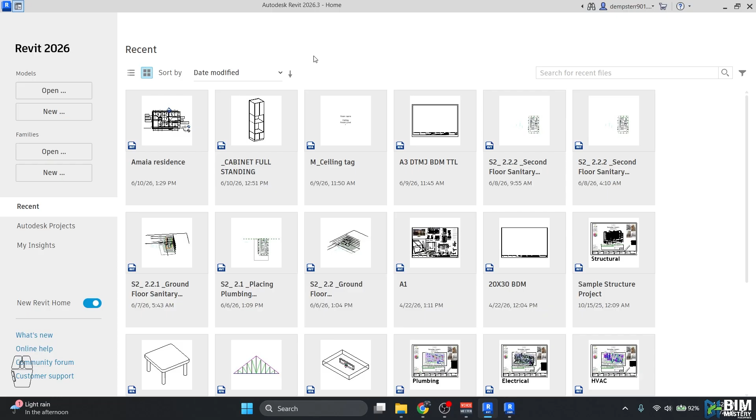So dito sa lesson na to, i-develop natin yung ating second floor sanitary and then vent system. So para magawa 'yon, let's go ahead and open our file which is etong ating S2 2.3, second floor sanitary system. And then make sure natin na all supported files and then wala tayong work sharing, and then hit natin yung ating open after natin mag-click. And then after nito mag-loading, dadalhin nito tayo sa ating second floor sanitary system.

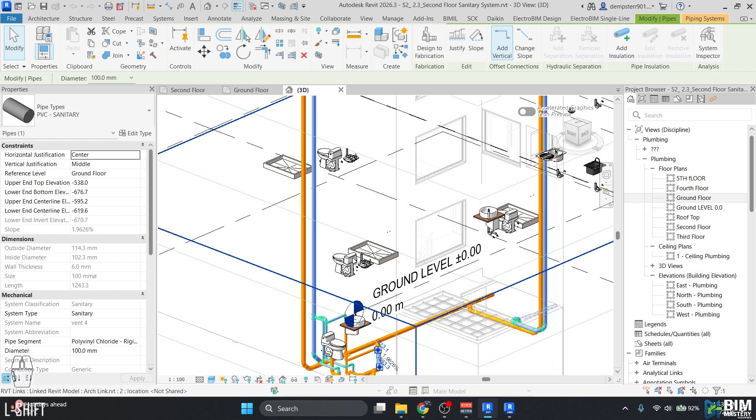Okay? So remember our last lesson, nakapag-develop tayo ng ating sanitary system and then also yung ating vertical waste and then vent system natin. Yan, titignan natin sa 3D view. So ito yung ginawa natin last lesson. So i-continue natin to and then i-connect natin yung mga fixtures natin dito sa ating vent and then sanitary horizontal natin, sa second floor.

So let's go ahead and go to second floor. Yan, let's close our ground floor and then 3D view. And then let's inspect first. So kung makikita natin in our 3D view, tignan muna natin that we have our fixtures. But since nakapaglagay tayo ng tinatawag natin mga plumbing connectors, dito na tayo magko-connect. So this plumbing connectors is very useful when it comes to connection, pag-connect ng mga pipings natin.

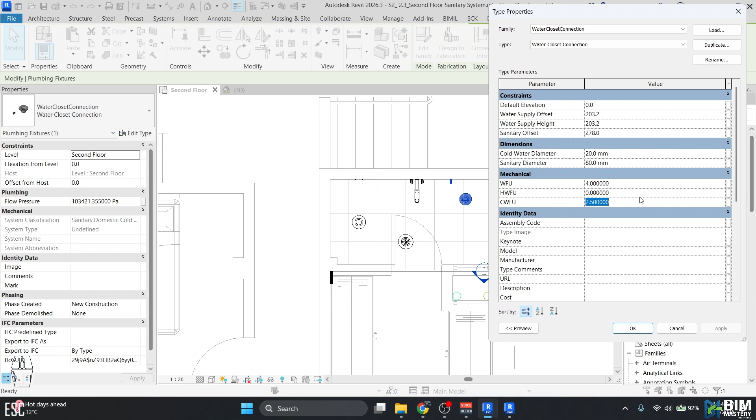Okay, and then also kung makikita natin, meron na rin itong mga GPM values, flow pressure. Ito, meron na tayong water fixtures unit, hot water fixtures unit, and then cold water fixtures unit that we can set to actually provide some of the detailed information for our pipe.

So before that, let's make sure na nasa second floor tayo and then let's inspect right here. So itong section na to, we can delete this section. Okay? Ayan. And then I think dito tayo mag-uumpisa. So to do this, ito i-connect natin siya papunta dito. Gagawa tayo ng main horizontal branch natin dito. And then dito, i-connect natin yung mga pipings natin papunta dito, as I can see.

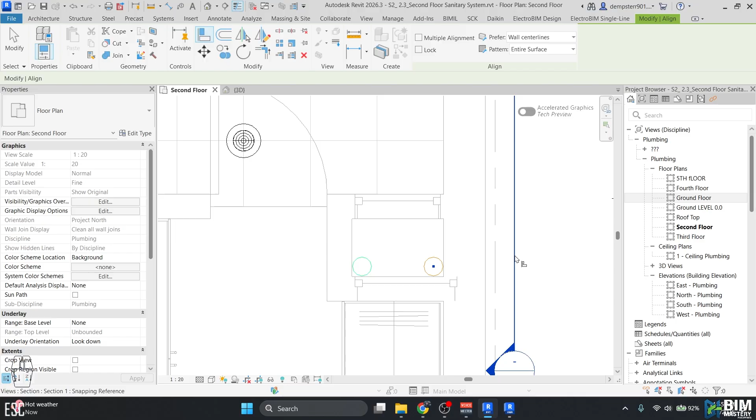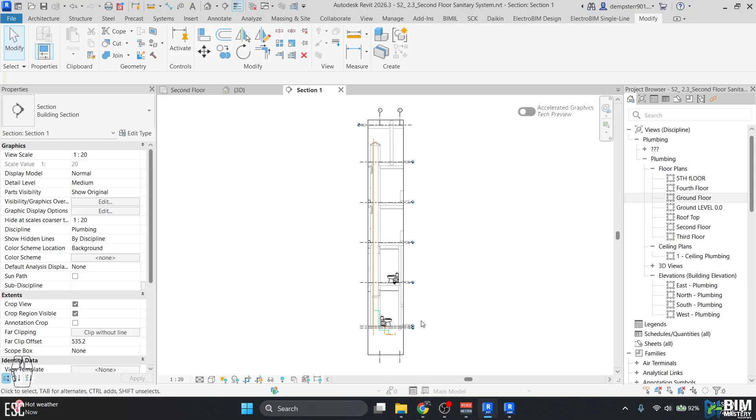So in-align natin yan para makita natin ng mas maganda yung ating pipe. So ito, i-align lang natin hanggang dito na hindi natin ma-cover yung ating vent system. Kasi kapag kinover natin yan, may tendency na kapag pumunta tayo sa section and nag-type tayo ng PI, may tendency po na ma-connect natin. Ayan, kung mag-hover tayo dito and then pansinin niyo dito sa gilid, makikita natin na pipe PVC vent, 100 mm. Yun yung nearest pipe niya.

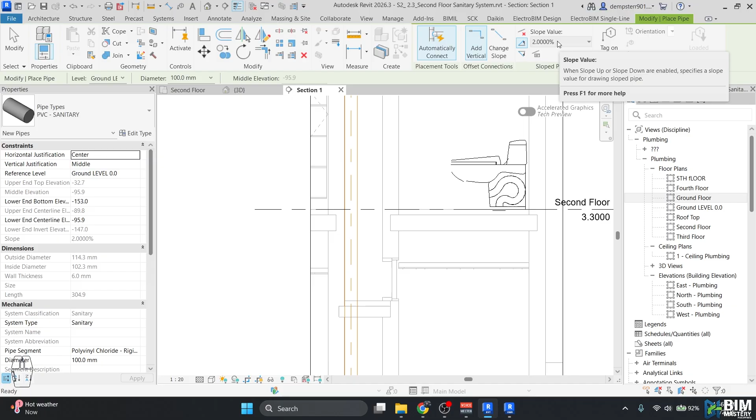But if we adjust our scope sa ating section box, click natin, then click natin PI. Remember, di na natin ma-hover yung ating vent system kasi yan lang yung kinover natin. Okay? So in this case, dito tayo gagawa. Click natin to dito and then make sure na yung slope natin is 2% and our pipe is 100 mm. So click tayo dito and then make sure na nasa ilalim tayo ng second floor elevation natin. And then dito natin siya gagawan ng ating pipe.

Okay. So to do that, madali lang po yan. Ang gagawin lang natin is hover tayo dito. Click natin yung pipe. Click natin yung create similar under modify pipes. Or we can just type in CS on our keyboard. And then dito, draft tayo. And then we're gonna make sure that our slope is on slope up, and then slope value natin is on 2%.

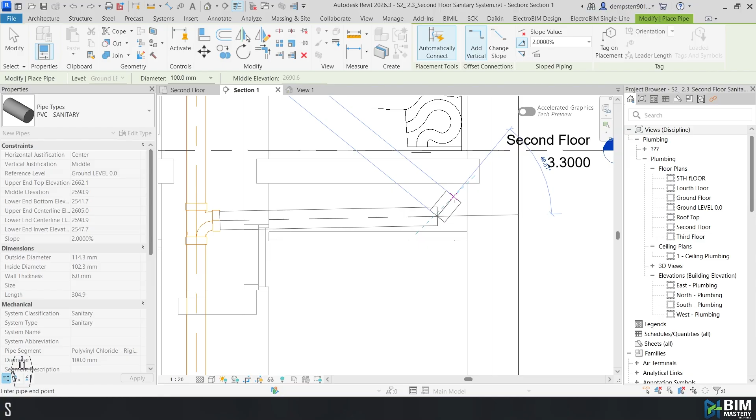Okay? And then click tayo dito and then hover tayo until dito sa gilid, and then we're gonna make sure that we are running on about, let's say, 45 degree. Or cancel muna natin. So make sure lang natin that we are on above ceiling. And then click natin yung pipe, CS again, and then click tayo dito, 45 degree. And then delete natin yung excess pipe. Zoom in tayo dito, right click natin, and then component. And then view natin yung ginawa natin.

So on our 3D view, this will be our clean out for that specific horizontal branch. Okay? So, ang next step naman natin, after natin i-connect yung ating ano dito, what we're going to do next is to set up our branch. Ito, i-connect na natin to from our horizontal. Ito mga accessories natin, ito mga pipe, ay yung mga plumbing connectors natin na to.

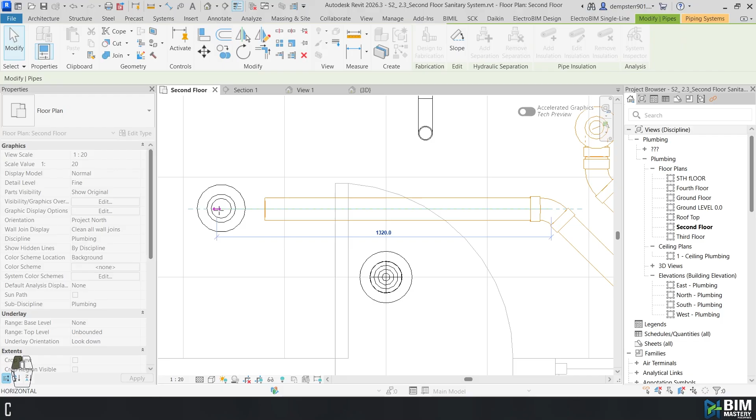So if ever hindi natin sila ma-connect, what we can do is to right click right here and then align natin. Zoom in lang tayo. Yan, and then make sure na center yung ating plumbing fixture, and then hover natin and then up to right here. Okay? So magko-connect na po yan sila. Okay? So our next is this one.

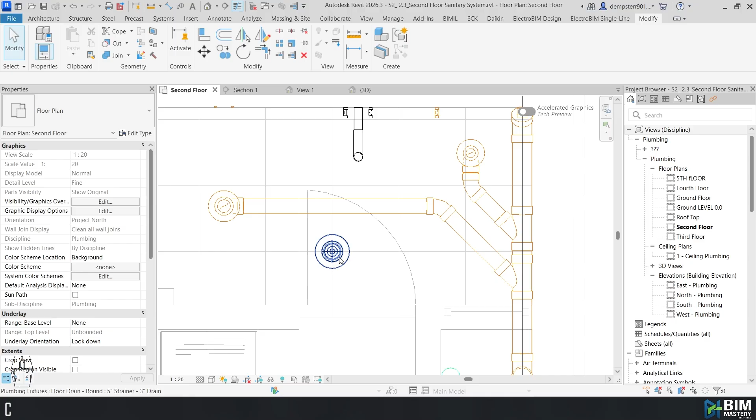So, click tayo dito. CS natin to. And then, inherit size, inherit elevation, and then right here, 2%. And then, click natin dito. And then, connect natin dito. Okay? And then we're gonna make sure that we change this on to WYE 45 degree reducing. Okay? And then ito.

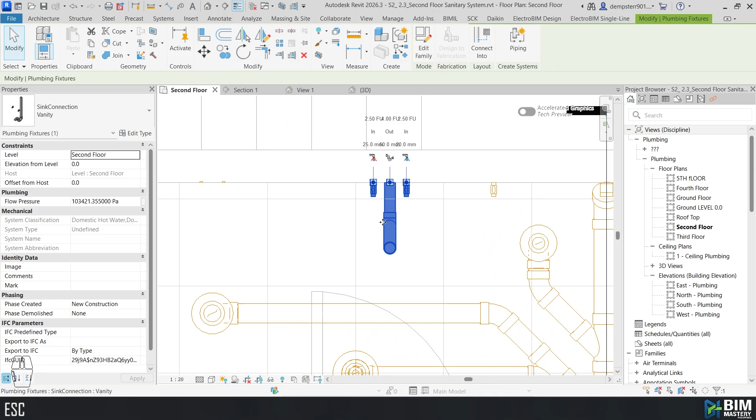Okay? So our next step is the tinatawag nating sanitary or yung ating lavatory. So to do that, click lang natin to, CS, and then inherit size, inherit elevation, slope up about 2%. And then we're gonna make sure that we are running on 45 degree right here. And then eto, palitan natin ng WYE 45 degree reducing. And then I think this connector is on 50 mm. So click natin to. 50 mm.

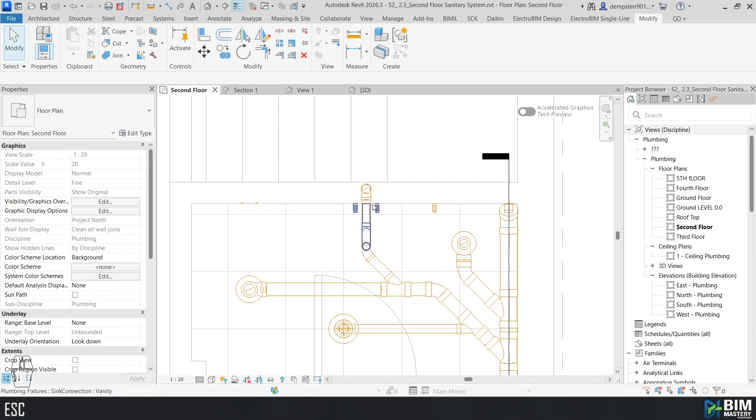We can also inspect that by clicking our connector and then zooming in. Makikita natin that we have our 50 mm dito. So since alam na natin connector, we can click and then right here. Sorry. I think this one. And then draw pipe tayo and then click natin dito para ma-connect natin sila. Okay? So, eto, ang gagawin natin dito, kasi gagawa tayo ng vent system natin dito, since connected na sila lahat, we can align this first right here.

Okay? So, after natin ma-align yung section, open ulit natin yung ating section 1, makita natin that this is our, tinatawag nating sink lavatory. But as we can see, yung elevation from level natin is a bit weird, I think hindi natin na-set up yung elevation from level natin.

So, I think this elevation is around 330 para dito. Enter natin dito and 330. Okay? Yan. And then, our connector says that, makita natin, we have a sanitary connector, 500 mm.

So, I think, edit type natin to. And then dito, sanitary connection height is on 500 mm. Okay, sorry, 500. And then our default elevation is on 250. And then dito sa sanitary connection height natin is on 500.

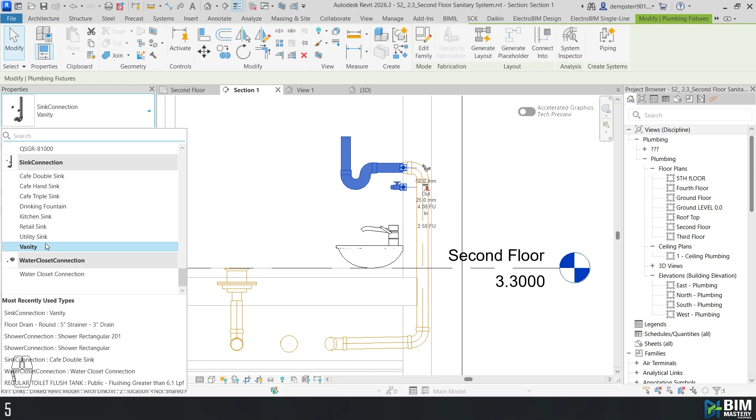And I think sanitary. Sorry, cancel muna natin. Yan, parang may mali tayong inedit. So 330 to. Duplicate natin siya. Yan, edit type. And then, duplicate natin. Gawin natin 203 to. Sanitary sink, 203. Apply. And then, make sure na ang ating sanitary connection height is at 500.

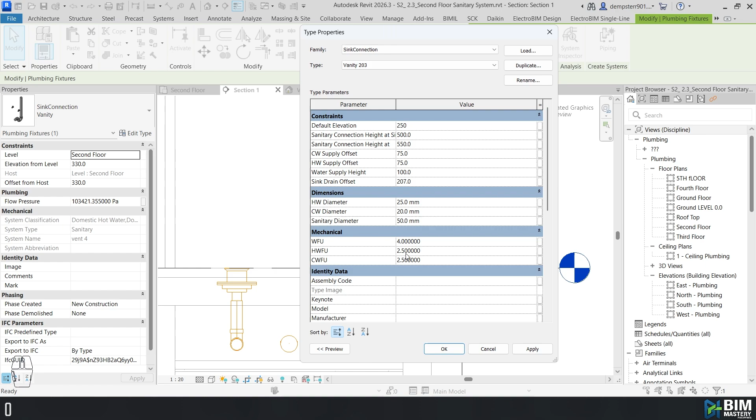Okay. And then, 550 naman dito sa ano. Yan. 75, 75, 100. And then, dito sa sink drain offset is 207. Okay. And then, of course, yung elevation natin is at 250. Yan. And then, WFU 2.5, 2.5, 4. Apply natin. Then, click natin.

Okay. Yan. So, I think okay na yung ating sink. So, let me, ano muna saglit. Yan. Check if okay na yung ating sink and then drain. Yeah. So I think ito na yung ating sink. So okay na siya dyan and then align na siya.

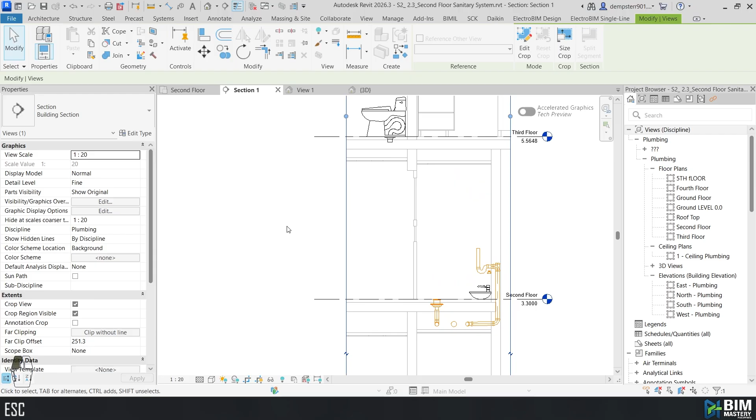So dito, click natin yung ating pipe fittings na to, yung elbow, and then click natin plus to make a connection for our tinatawag nating vent system. Yan. So ang vent system natin is dadaan natin sa ceiling papunta dito. And then connect natin siya sa ating horizontal branch. So to do that, ang gagawin natin is punta lang tayo dito sa ating ano.

Yan. And then eto, padaanin muna natin siya diyan sa taas. So balik tayo sa section. Click tayo ng PI for our pipe and then make sure na ang gagamitin natin is PVC vent. And then our system type is on vent system. Click natin apply, click natin dito, and then padaanan natin siya dyan sa taas, slope 0, and then dito.

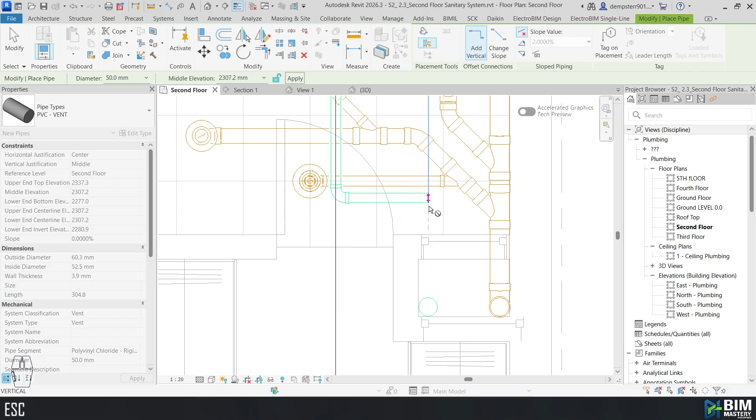Okay? So after natin may daan sa taas, we're gonna go to our second floor again to make sure na makita natin yung ating vent system. Yan. So dito, adjust natin yung ating piping. Right click natin dito, draw pipe. Wala naman pong specific. So just like this one lang. Yan. So ito, na-connect na natin siya sa ating piping.

So we're gonna view that onto our section. Adjust natin tong section natin na to dito. Yan. And then click natin. As we can see, this will be our vent. Kinonect na natin siya sa ating vertical vent stack. Okay? So after naman nito, ang next naman na gagawin natin is yung connection naman para dito sa ating water closet.

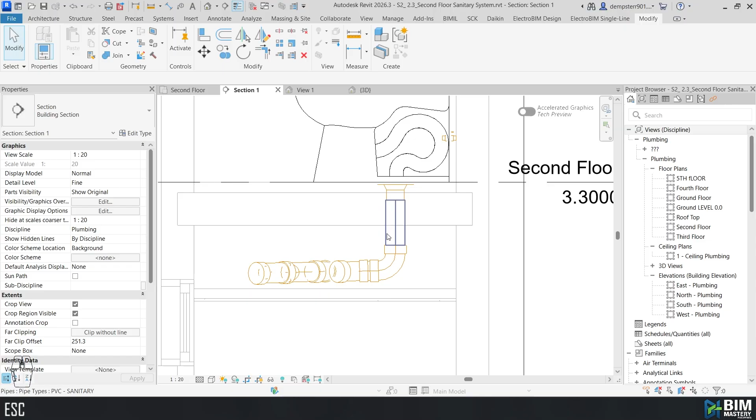So to do that, align lang natin yung ating section sa ating water closet, and then double click natin yung section, na ito yung ating water closet. So either way, we can just CS dito, and then I think dito about 50 mm, yes, yan. And then slope 0, I think okay naman, or kung hindi, what we can do is to adjust muna yung piping natin, pinabababa, yan.

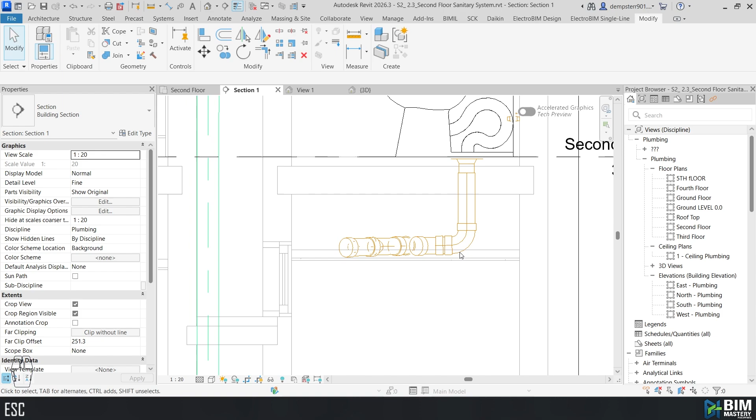So click natin yung pipe again, or click tayo ng PI, yan, and then make sure na our system is on vent, and then our pipe type is on PVC vent. Yan. So click natin to about 50 mm. So click tayo dito, and then adjust natin yung ating piping. Nasa pinakasagad po, yan. And then ito, adjust natin paangat. So hanggang sa ma-satisfy lang natin yung constraint.

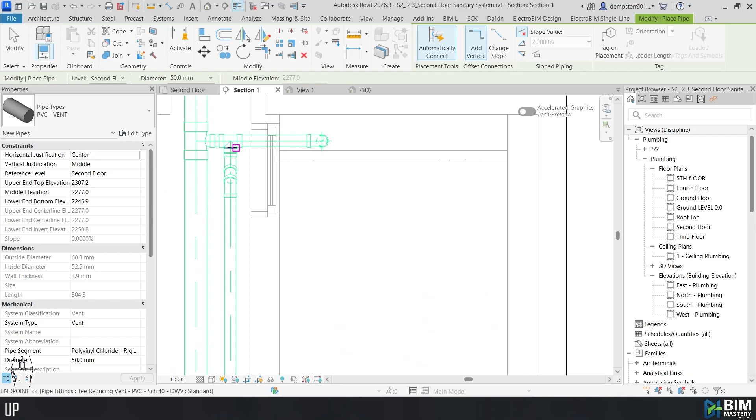Yan. So cancel na natin to. And then ito, okay na yung ating piping. So we can just go ahead and then drag, and then paakyatin natin dito, papunta dito. So right click natin tong end, draw pipe, papunta tayo dito, and then akyat tayo dito, and then connect natin siya dito. Ayan. So I think okay na yung ating vent.

We can view that onto our 3D, and then we can adjust our section box. Ayan. Tingnan lang natin. Yan. So ito po yung ating vent system. So I think may error lang tayo dito. I think ito, we need to fix this one.

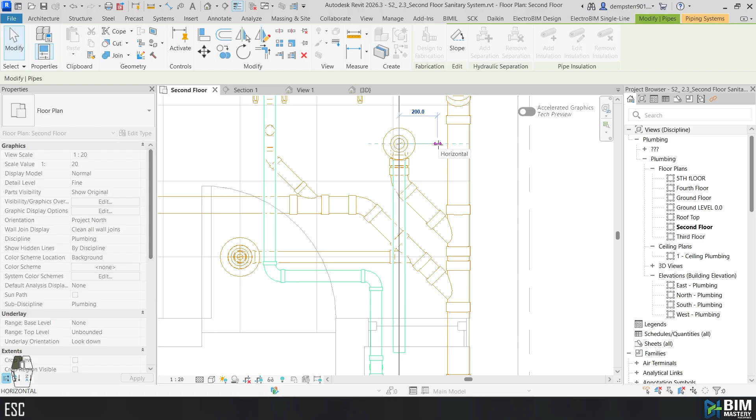Disconnect na lang muna natin sila, and then we can just go ahead and fix that. So let's go and then delete muna natin to, and then go tayo sa ating second floor. Ito yung ating pipe. What we can do is we can rotate this. Yeah, we can rotate it na muna. Right click natin dito, and then, no, dito muna tayo, labas muna natin, then draw pipe, and then click natin dito, dadaan natin siya dito.

Okay, so as we can see, we have a wall right here. So adjust natin to ng sagad lang sa wall natin, and then i-align natin siya dito sa gitna ng ating pipe. Just like that one. Okay, so after that, we can align this one right here to here. Para ma-drag natin, and then connect natin sila dyan. As you can see, if we go back to our 3D view, mas okay yung ating vent. Nagdaan natin siya ng mas maayos.

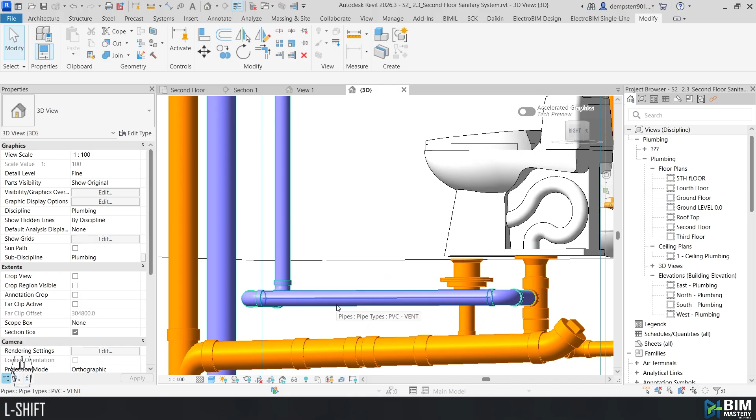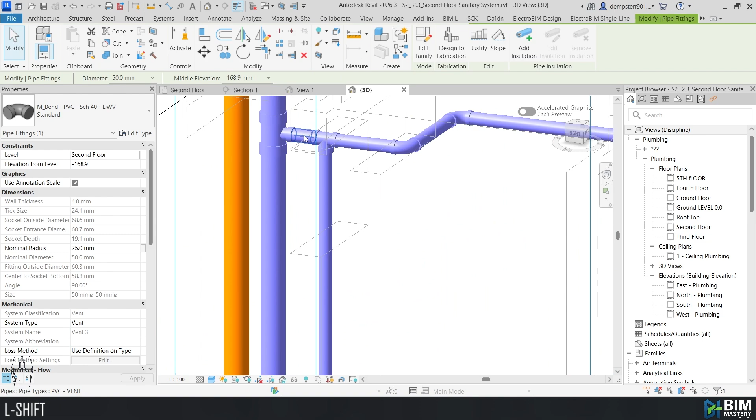But as you can see, we have a beam right here. So ito lang yung magiging problema natin dito sa mga beams. So either way, we can go ahead and fix that by idaan na lang din natin siya sa ceiling, and then papunta siya dito. So since naka-identify natin yung issue, we can delete this one, click our pipe, and then click muna natin tong elbow dito, and then click natin dito, and then we can tab, and then click para ma-select yung buong pipe system natin, and then delete. And then click lang natin yung minus.

So balik tayo sa second floor, we can adjust and then go back right here, and then adjust natin siya dito. And then go tayo sa ating section. So dito sa section, right click natin, draw pipe. Taakyat natin siya dito. And then i-align natin siya dito. And then dito, I think okay yung ganyan. And then balik tayo sa second floor. This will be our piping system. Either way, we can connect it right here.

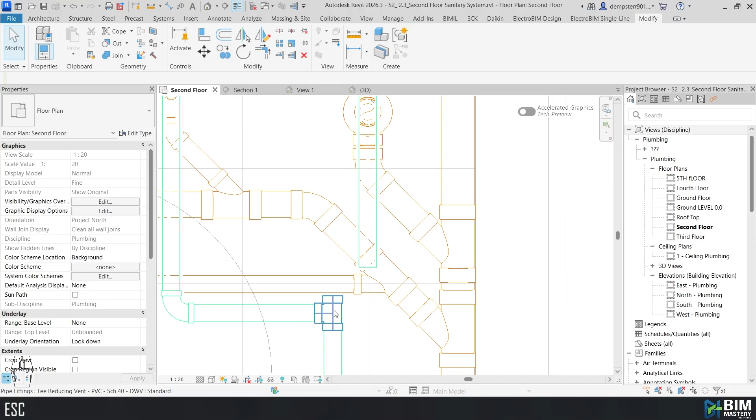But ang gagawin na lang natin is click natin tong plus dito. And then i-align natin siya dito, just like this one. And then right click, draw pipe, and then pupunta tayo dito. So if ever na hindi sila mag-align, gagawin na lang natin is Ctrl Z muna natin. I think we can just go ahead and draw a 45 degree, and then right here, and then right here. So yan po yung ating piping. So I think okay na, and then we can just view that on our 3D view. That is our vent systems for our water closet, and also for our lavatory.

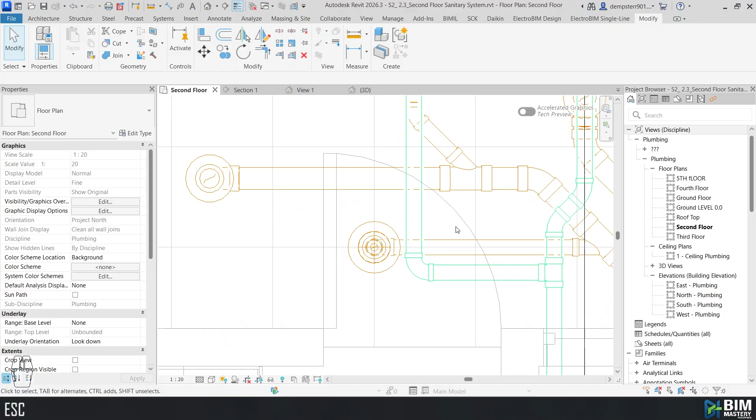So next thing naman is gawan natin to ng P-trap. Pwede natin siya lagyan ng P-trap. We can just go ahead and click this one, and then go to our 3D view, click natin tong elbow na to, and then palitan natin siya ng P-trap. So if ever na 'changing the family of MEP fitting might cause unexpected results,' cancel natin. If ever na ganun po yung error, click natin yung pipe na to, or we can go to modify tab, nandito yung ating split element, and then split natin siya dito. And then delete natin to. And then palitan natin to ng P-trap.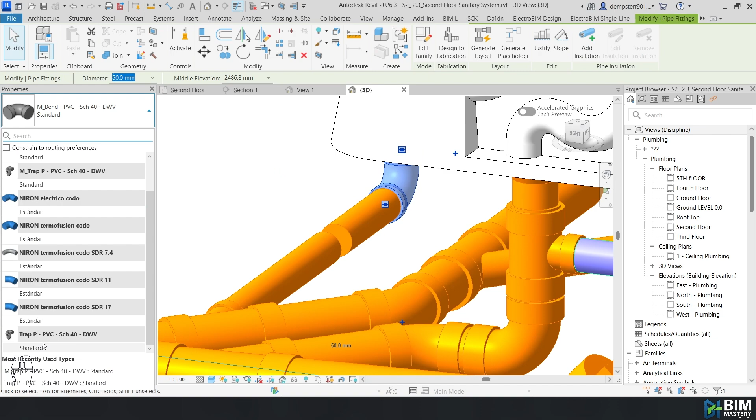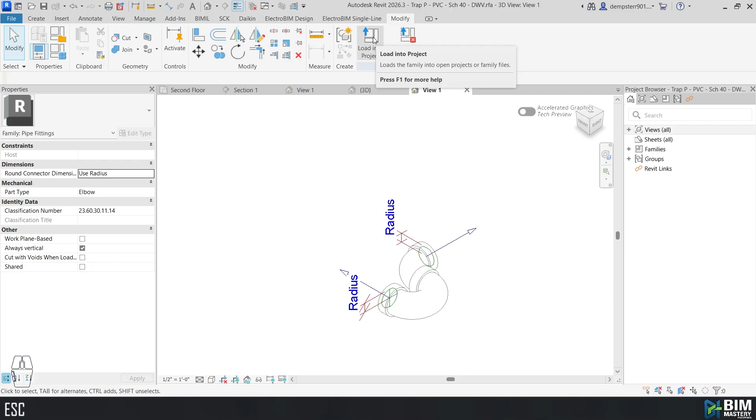Before natin change, delete muna natin yung pipe na to, and then click natin yung P-trap. Itong P-trap na to, edit natin yung family. Ito yung out natin. So we can click this out, and then system classification is on sanitary. Flow direction is on bidirectional, and then allow slope adjustment. And then ito rin, palitan natin to into sanitary. After that, we can load it back onto our project S2 2.3. And then we can go ahead and overwrite existing version.

And then we can go ahead and connect this to our P-trap. So if ever na ganyan, we can go back to our second floor. And then hide muna natin to, temporary hide. And then right click, draw pipe dito. And then connect natin sila dyan. If ever na ganito, we can just go ahead and make tayo ng section.

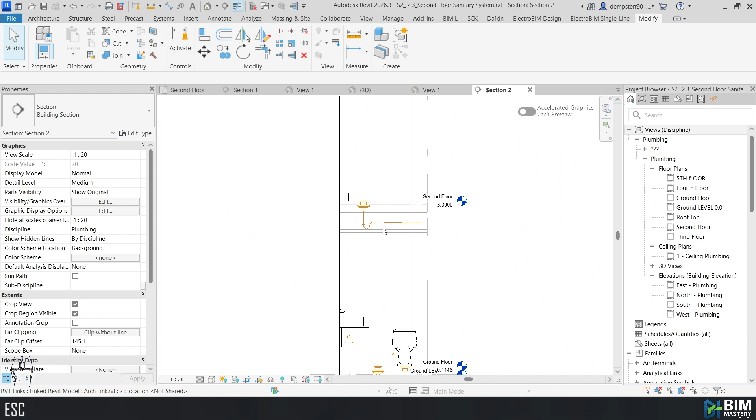So if ever na ganyan, we can do is align right here to here, and then maybe we can just go ahead and right click, draw pipe, and then slope down to 2%. Yan. And then change natin into P-trap. Again, we are getting some error.

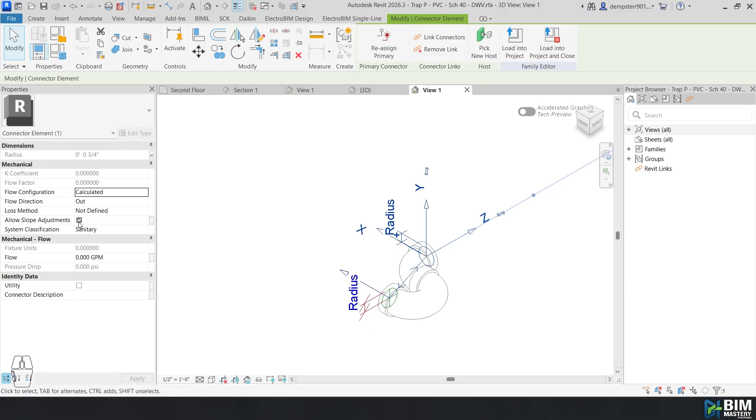So, since we are getting some error, na nakikita natin na MEP changing, so edit family type natin. So dito, ang gagawin natin is dapat ito naka system classification on sanitary, okay, allow slope adjustment. However, dito sa isang pipe fittings natin, we gonna make sure that our system classification is on fitting. Dito naman sa portion side na to.

And then we can load it back into our project S2 2.3. Load, and then overwrite existing version, and then right click natin dito, draw pipe, and then connect natin sila. So should be magko-connect na yan. If ever na hindi pa mag-connect, ang gagawin nyo is delete nyo tong pipe na nandito. Okay? And after that, right click natin, draw pipe, and then slope down tayo ng 2%, and then connect natin siya dito. Okay, if ever na ganun.

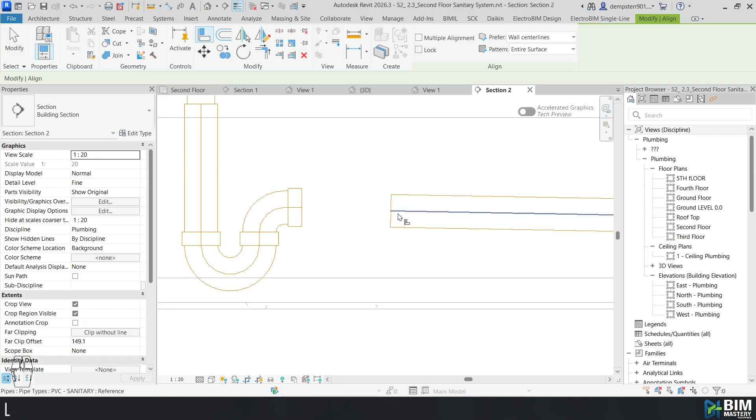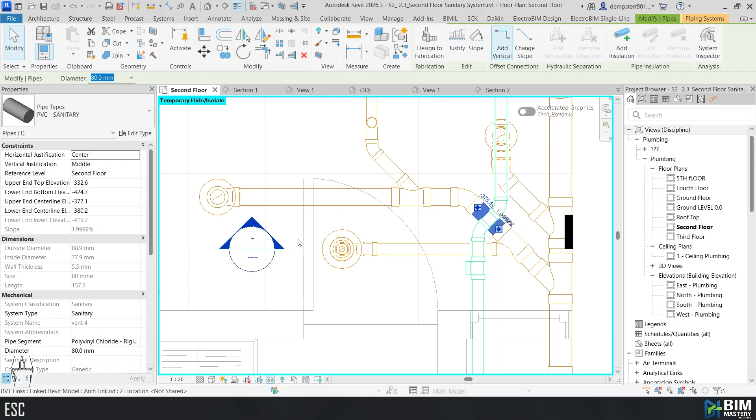Okay? And then after that, we can just go ahead and right click. Draw pipe and then connect natin sila dito. If ever na hindi pa mag-connect, we can just go and delete this pipe. Right click, draw pipe and then connect natin siya dito. So as we can see, perfect 2% yung slope down natin, and right here okay pa yung mga slope natin. So we can just go ahead and adjust. If ever na hindi natin ma-adjust, we can just go ahead and leave this kasi I think okay naman sa gypsum natin, wag lang tamaan ng metal furring. Okay? So, since okay na to dito,

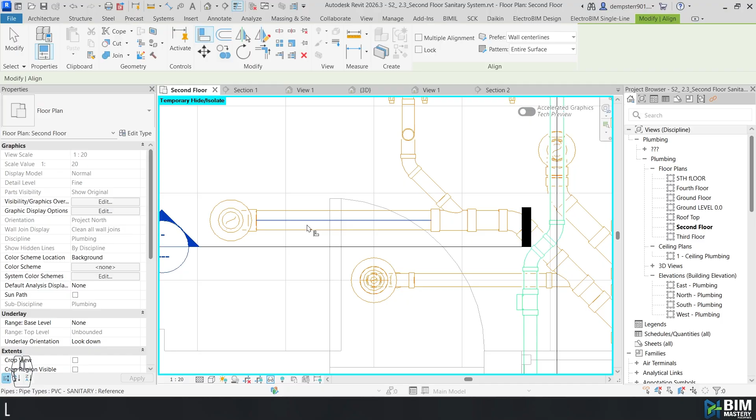So, click natin dito and then make tayo ng PI, PI, and then click natin yung vent, apply. And then dito sa ating ano is make sure na PVC vent yung select natin. Gonna make sure that we are running straight dito, and then dito is on 50 mm. And then right here on our second floor, we could just go ahead and right click, draw pipe, and then draw tayo dito. If ever na hindi mangyari ganyan, what we can do is to go back onto our section, which is section 2.

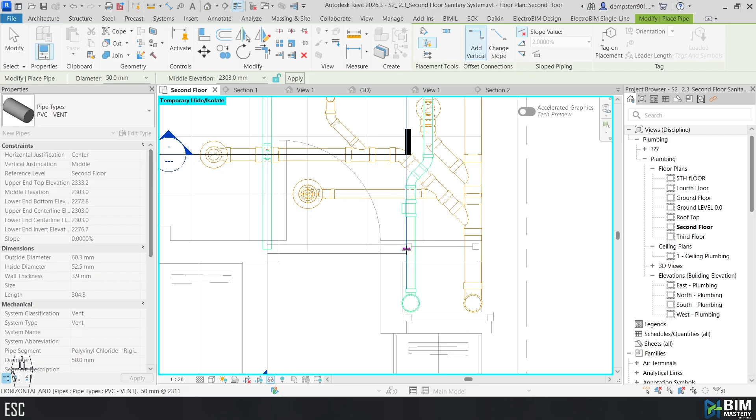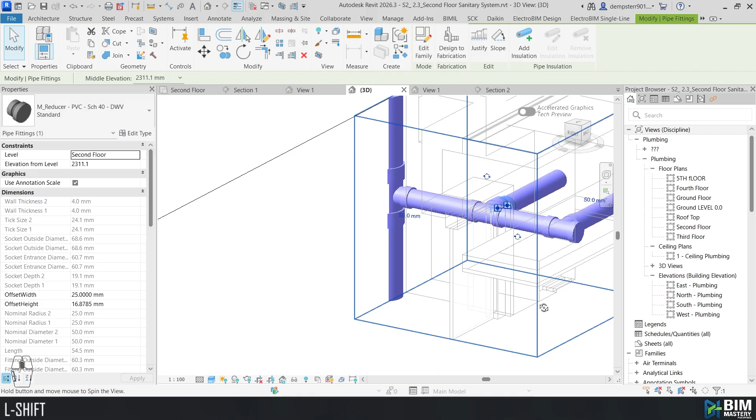And go back to our second floor. And then dito natin siya i-connect. So right click natin dito, draw pipe, and then connect natin siya dito. Okay? So if ever, we can just delete the existing fittings, and then we can go ahead and view that onto our 3D view. So, click natin itong fittings and then make tayo ng selection box para ma-view natin siya on 3D view. And then we can see, hindi masyadong align yung ating ano, kaya nagkaroon siya ng weird fittings na ganyan.

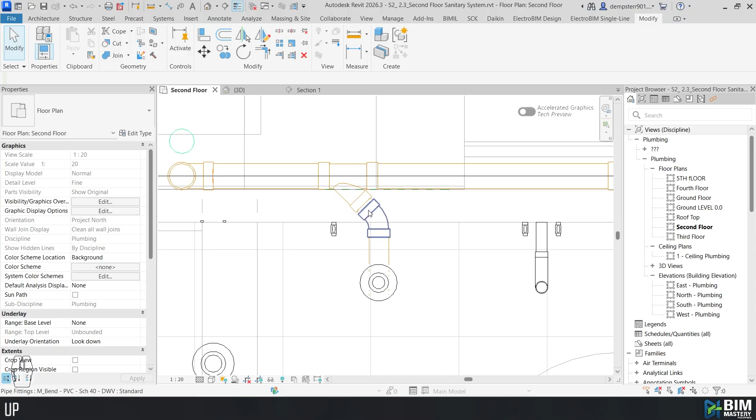Until we adjust it like this. I think this one is good, and then let's adjust the fittings. Okay? And then cancel until we finish the fittings, maximum. And then here, let's align them to the center of our pipe.

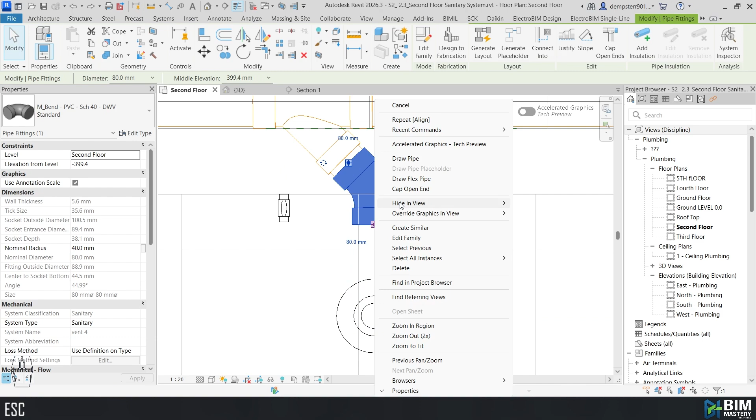Okay? So if they're already aligned, we can just go ahead and drag. If it's not draggable yet, what we can do is delete that pipe, and then click the center, and then click this center. Right click, draw pipe a bit, and then click here.

But if we hover on the side, this means we are connecting to this side. So we're still connecting it to the body here, so it will still connect to our connector here. So we don't need to trace the center anymore. Rather than tracing it, we can click on the sides, even here, see, it will still connect to the sanitary connector, which is 80mm, 80mm, and 80mm.

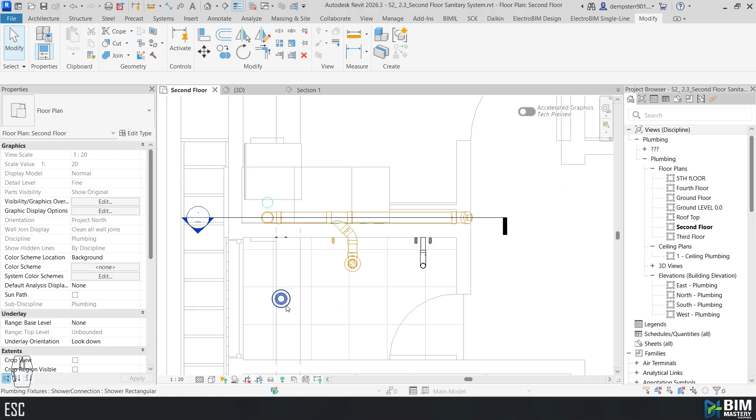So that's it. And then for this part, we go here. Let's route it here. Click this pipe, click CS, and then here we go 45 degrees. After we create the 45 degree, delete this pipe fitting, and then click this. Let's change it to WYE, 45 degrees, reducing.

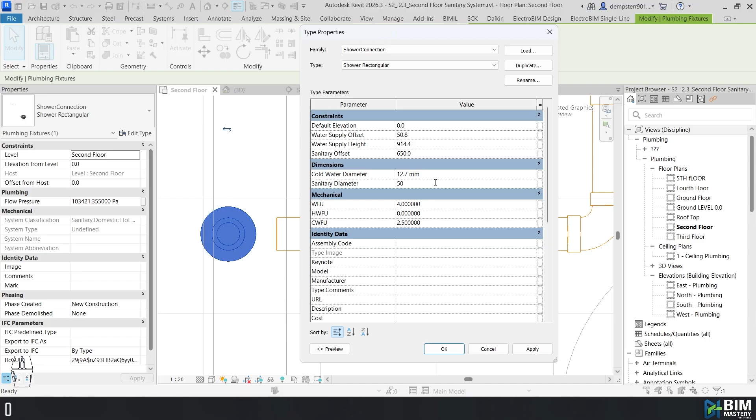And then here, click here, and then here, and then here. We're gonna make sure our slope is still at 2%. Okay, and then let's align them here. I think this one, let's change our shower, make it so the sanitary connector is 50mm. Okay, apply, and then click OK.

And then let's change this. Click this pipe. Click it here. Hover here, then hit tab. Click, and change it to 50mm. Okay, and then let's connect it by dragging again here, so we can connect that part.

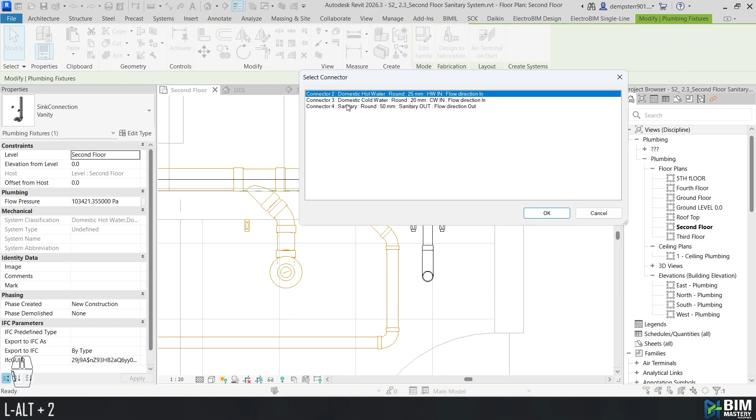Either way, we can choose to... let's finalize this. Let's connect it here. Okay, so to do that, we'll just connect into it. Click this pipe, connect into, click the sanitary round 50mm, and then click this pipe. If it doesn't connect like that, what we can do is right-click, draw pipe, and then click up to the center of our pipe.

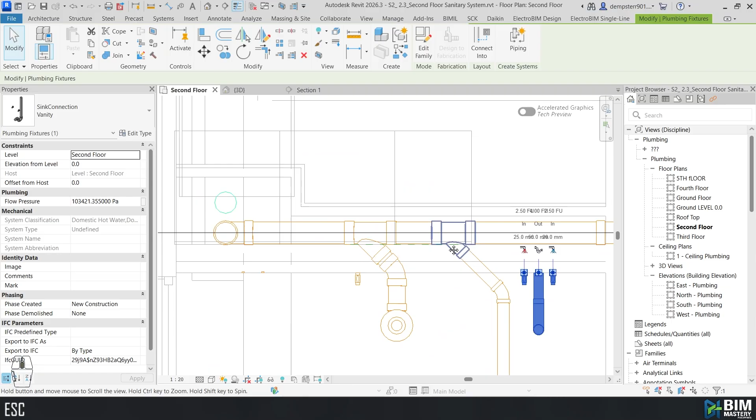The resulting angle segments is too great or too small. So what we can do is go ahead and make a section first, if Revit cannot identify the right fittings for that one.

So we can align this section to the center, and then we're gonna double click, and if this will be our sanitary connector, I think this one is 330 again.

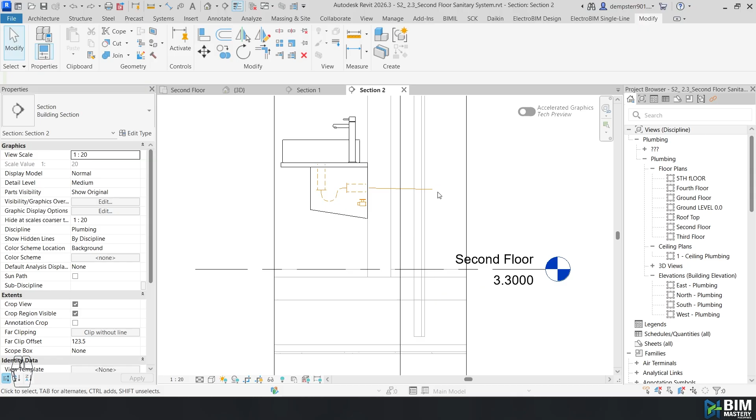Okay, since it's 330 now, right-click, draw pipe, and it goes through here, and then to here. Right-click again, let's repeat it, draw pipe, slope down 2%. Right click here and then click it here. I think, CS, CS.

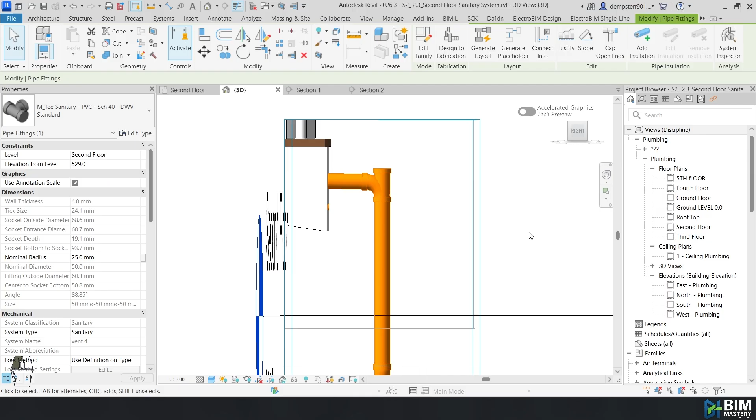We can view that in our 3D view by clicking any of these fittings and making a selection box. So this is the selection box we made. I think let's change this to WYE sanitary, which is 50mm, which is good for our specific part. Okay, so here, click the plus for our vent system and then our sanitary here.

So here on the second floor, since we've connected them all, what we can do is make a ventilation system for our part. Okay, so let's align this section here for this. Click the center, then click the section, then double click so we can make something here.

So let's check first if the fittings suffice for our part. Make sure we are on 50mm PVC vent and our system type is vent system.

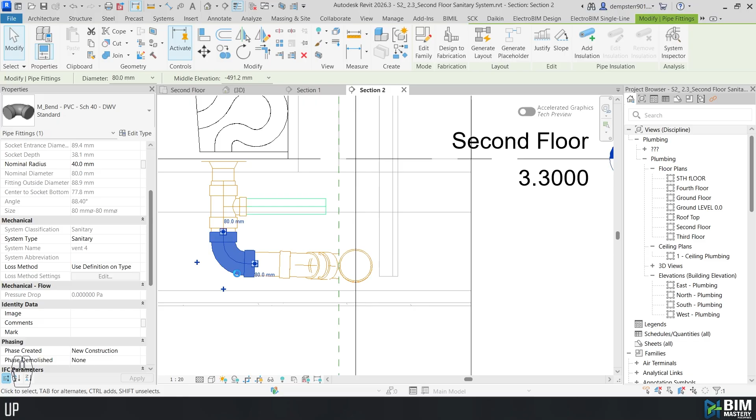Apply, click natin dito. And then we are about on 50 mm po. Yan, kung sumakto, swerte natin, tsamba lang yan. But if ever na hindi sakto yung sa inyo, what you can do is to adjust. I-lower nyo muna to and then click kayo dito, and then that's when you make some changes.

Dito, drag natin siya dito, papunta dito. And then, I think itong ano natin na to is pataas to eh, makapataas yung ating vent system eh.

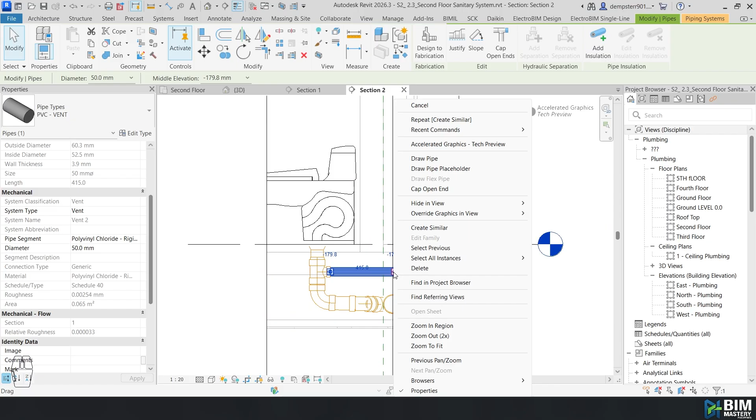So diyan na sila magko-connect. What we can do is to right-click, draw pipe, and then paangat tayo dito. And then, balik tayo sa ating second floor. I think okay na yan.

Dito naman, what we can do is to go back, etong section natin na to, align natin siya dito sa gitna dito. And then after that, we can double click our section, and then akit tayo dito banda. Click natin to CS, of course, vent sa ating pipe types and then sa system type.

And then palitan natin na yung 50 mm yung ating, at drag tayo dito. I said 50 mm, so I think 50 mm, baguhin na natin. Ayan, and then ito, connect na lang natin siya dito.

If ever na ganito, kasi hindi yan aligned eh. Paano ko nasabi? Kasi dito, makikita natin that we have our partition. So what we can do is to right-click, draw pipe, and then dito, and then dito muna. And then align natin sila gitna ng pipe dito.

Okay, since align na sila, what we can do is go back onto our 3D view, into our second floor. Dito pa rin tayo sa second floor, so i-align natin yung ating section dito sa ating pipe fittings na to.

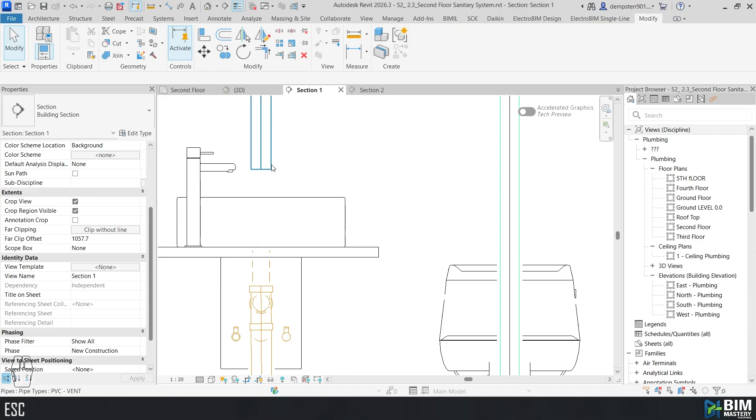We can go right here, then dito. And then right-click, draw pipe, and then connect natin siya wrap around right here. And then align natin siya dito sa gitna nito. Ayan, and then connect natin sila. Ito, connect na rin natin siya dito.

The next step is click natin tong fittings na to. And then ito naman yung gagawin natin ng vent. Dali lang yan, so gawin natin, para sa vent niyan, dito na lang din. So what we can do is to actually...

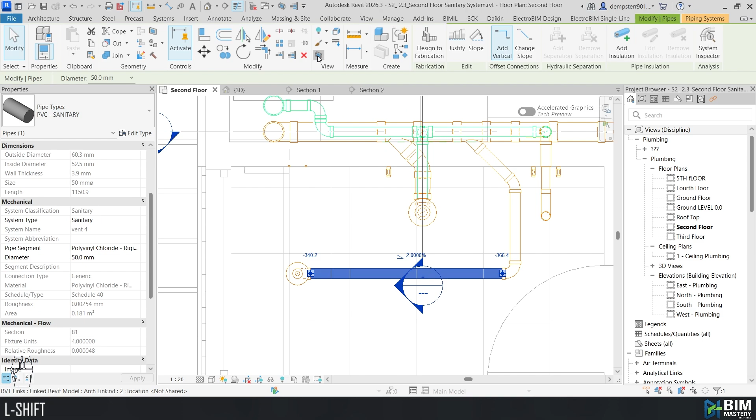Click right here, dito, papunta dito. Yep, but check muna natin yung ating clearance. So if ever okay yung ating piping, dito, punta doon. Okay, so dito na lang. Okay, so click natin to...

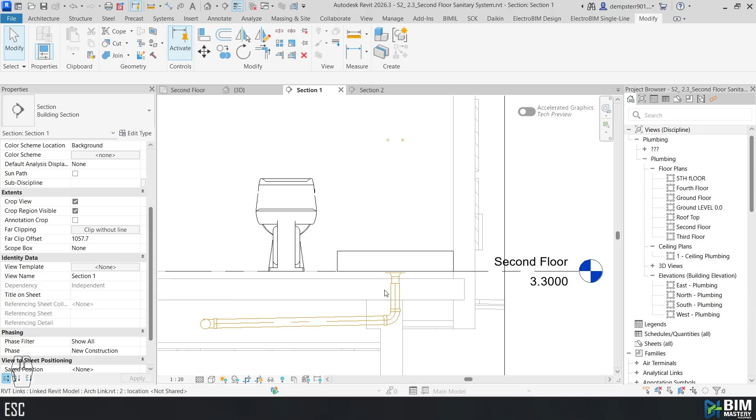Section tayo dito. Align natin dito, align natin yung section natin dito sa center neto. Double click, right click CS, and then click tayo dito. Our system and then our ano is on vent. And then apply, click tayo dito, click tayo dito, and then click tayo dito.

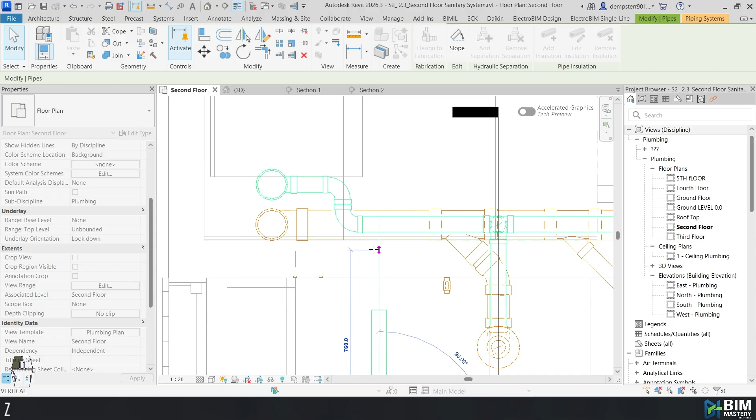Okay, so todo natin yung baba. If ever, go ahead and adjust, papunta dito, and then go back to our 3D view, sorry, our second floor pala, and then click natin yung vent pipe natin, and then drag natin siya dito, pumunta dito, and then we can go ahead and click some of things right here, if ever.

Hindi siya mag-connect kasi tatama yan, so what we can do is to right click dito, connect natin siya dito, and then dito, align natin, then dito. So dito natin siya i-connect. Ito, adjust na lang natin yung fittings hanggang sa masagad sila. So we can view that on our 3D view.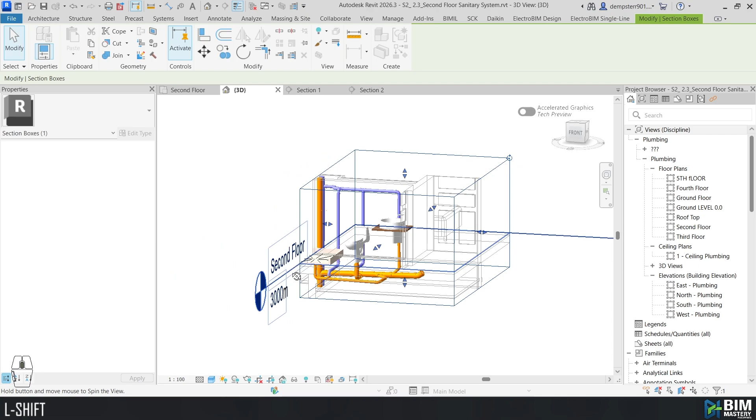Tingnan natin yung ginawa natin, and then you can view it right, just like this one. Yan na yung ating vent. So okay na tayo sa second floor.

The next step naman is yung para sa ating third floor. Sa third floor, gagawin natin yon on our 2.4. Ito, halos ano rin naman yan, ito lang nagkaiba, iba na yung position. And then we have a kitchen right here. So ang gagawin natin is magkakaroon din tayo ng additional na ano dito para sa ating kitchen.

Ang gagawin natin dito is dito, pupunta dito. And then yung vent system natin, of course, pupunta dito, para dito sa dalawang ano na to. And then, since meron tayong laundry area dito, we need some natawag nating ano pa dito, yung tinatawag nating drain. Maglalagay pa tayo additional drain dito. So see you guys on the next topic, which is 2.4, para sa ating third floor sanitary system.